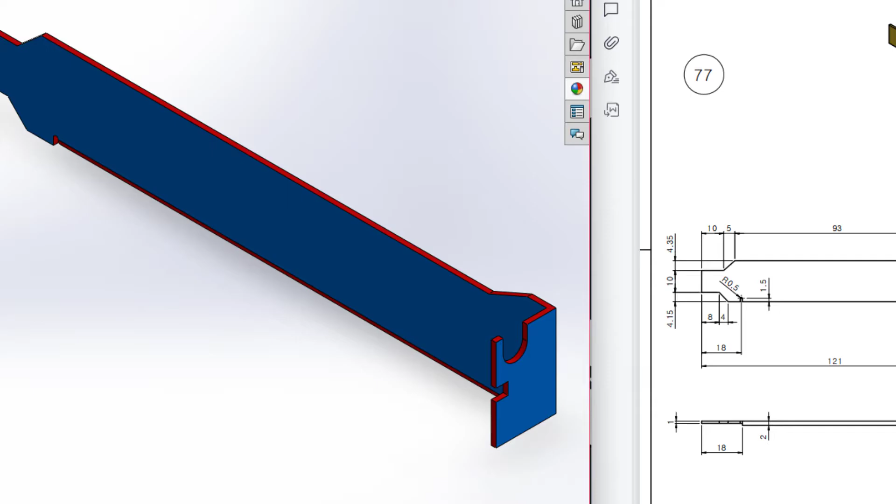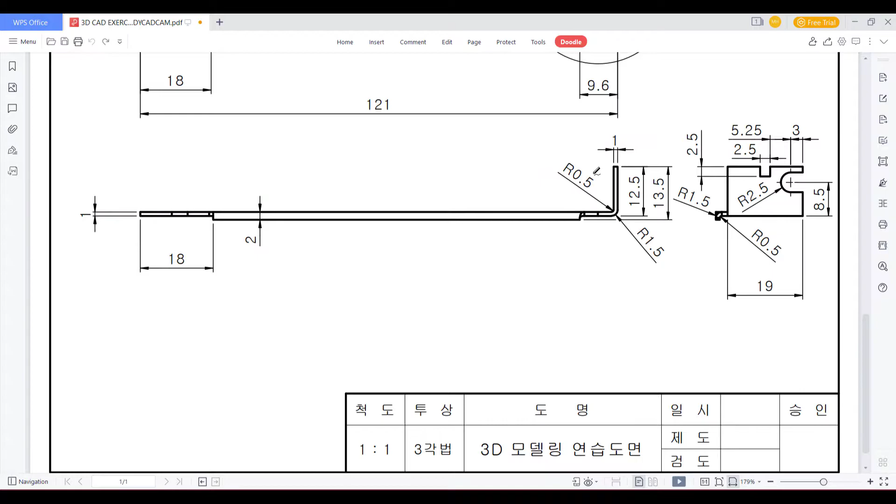Today we're going to solve this problem. In this problem, we can see the front view, the bottom view, and the right side view, which is cut here, but cut in here, so it is a 90-degree angle. Don't get confused. Here we can see it has an extrude boss of 1, and here it has 2, meaning the 2 extrude boss is this part.

So we first begin drawing with the bottom view. In the bottom view, first we will draw a line which is 121 minus 1, because 1 is the extrude boss. Then we will draw a length which is 12.5 minus 1, because 1 is the extrude boss length. So let's get started.

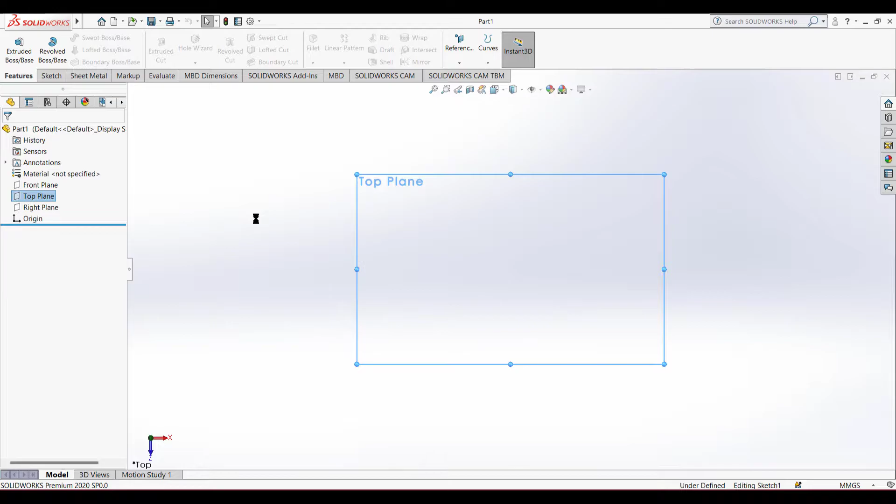First select the top plane and normal to it. As it is a bottom view, again normal this. Now we have got the plane. Now take the line and draw a straight line which is 121 minus 1.

Now draw another vertical line which is 12.5 minus 1. As you can see, we have drawn this line. Now it has 1 unit extrude, so we can offset this with this line.

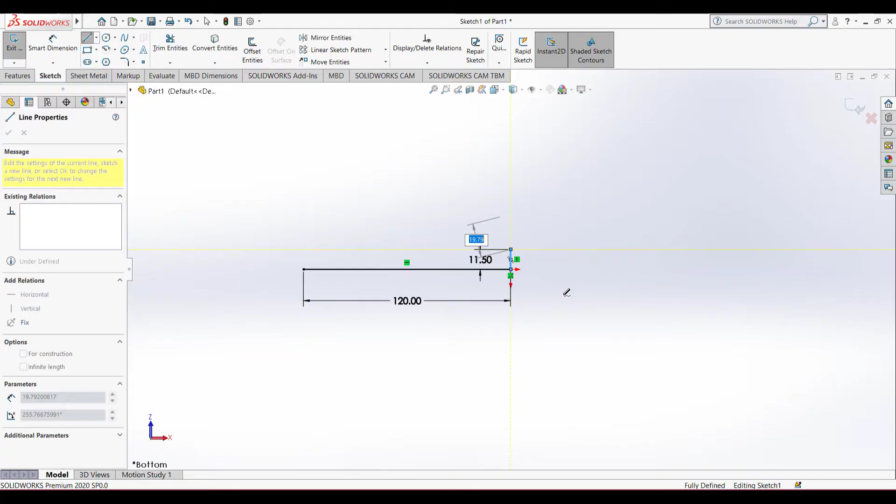Now go to offset entities, select this, and give the offset parameter 1. Now cap ends, lines, give OK.

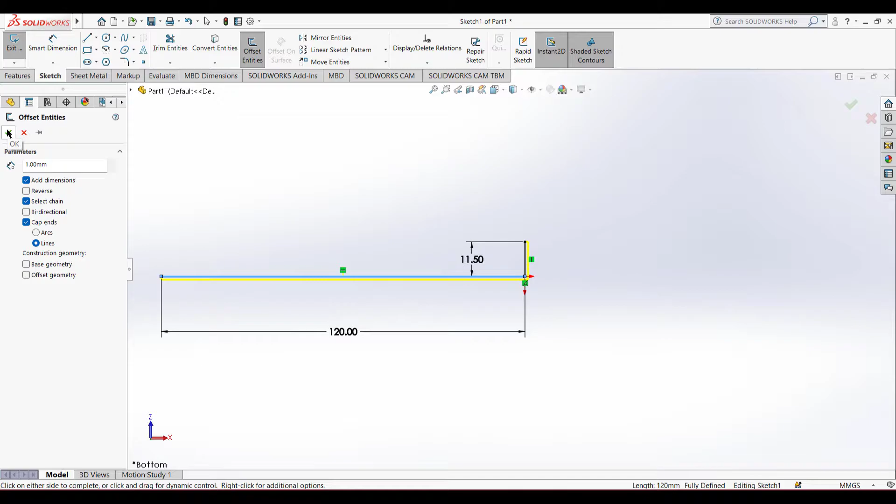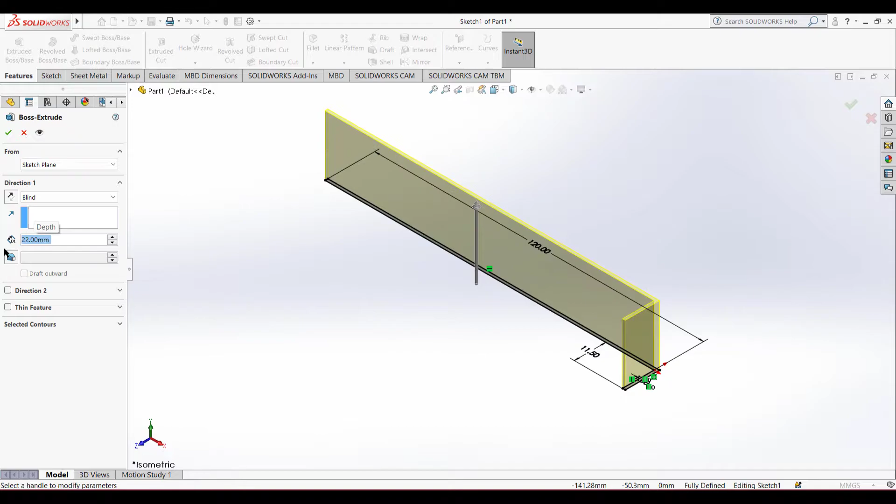Now extrude boss, go to features and select extrude boss. Here we can say it is 22 unit height, so give extrude boss of 22, enter. Now we have got the L-shaped shape.

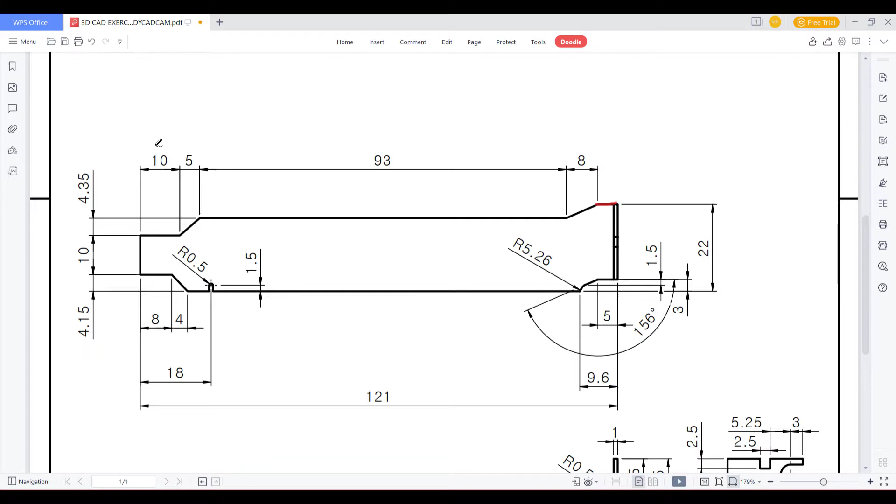Now we will draw this extra part and then extrude cut this. First we can see that this line is 121 minus 10, 5, 93 and 8. So first draw this line.

We'll draw this at the front plane. Go to front plane and normal to it. Now take a point, and now dimension it.

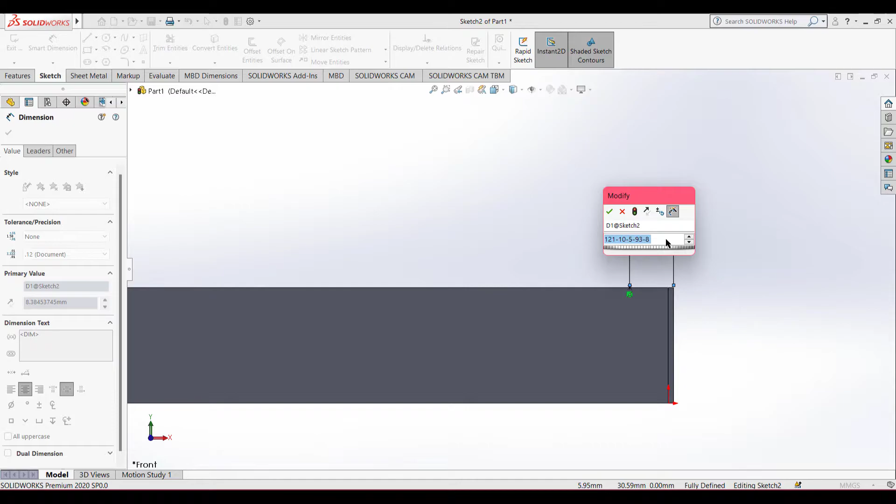As we know, the total length is 121. Now we'll subtract the length 10, 5, 93 and 8. Now give minus 10, minus 5, minus 93, minus 8. Give OK. You can see it has the 5 unit.

Now again go to line. Now we'll draw this line which is 8 unit in horizontal, and the vertical line will draw from 22 minus and all this length. Let's go for it.

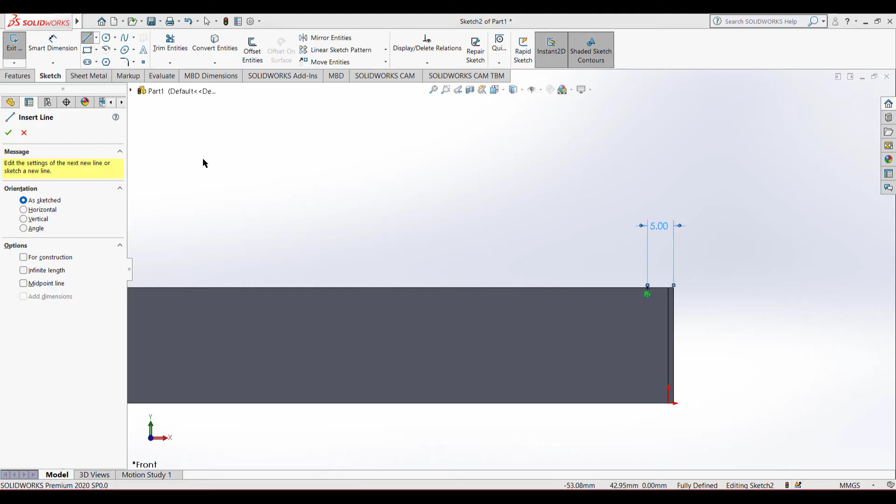Now select the line, select the point and draw a line. Now dimension it 8 from horizontal. From vertical, we will give 22 minus 4.35 minus 10 minus 4.15, which will lead to 3.5. Now we'll draw the 93 horizontal line.

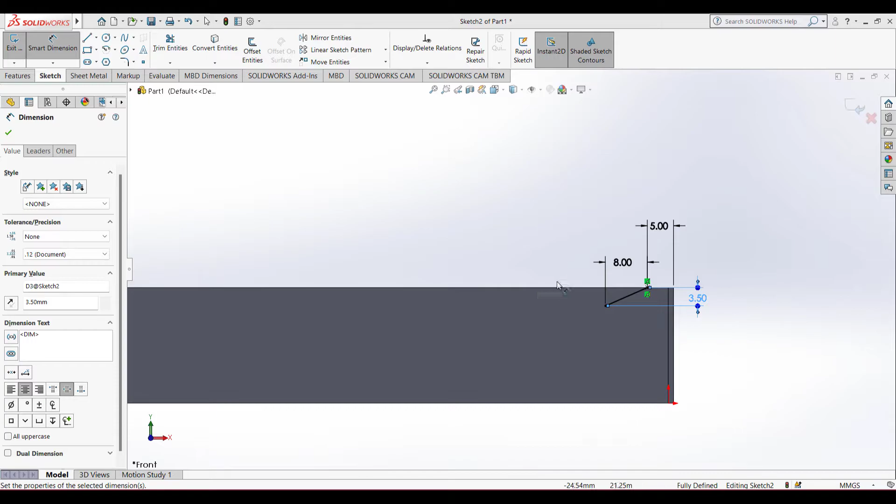Now again select the line and select the point and take a 93 unit line. Now again we have to draw another inclined line, which is 5 unit in horizontal and 4.35 in vertical. Now dimension it 5 unit in horizontal and 4.35 into vertical.

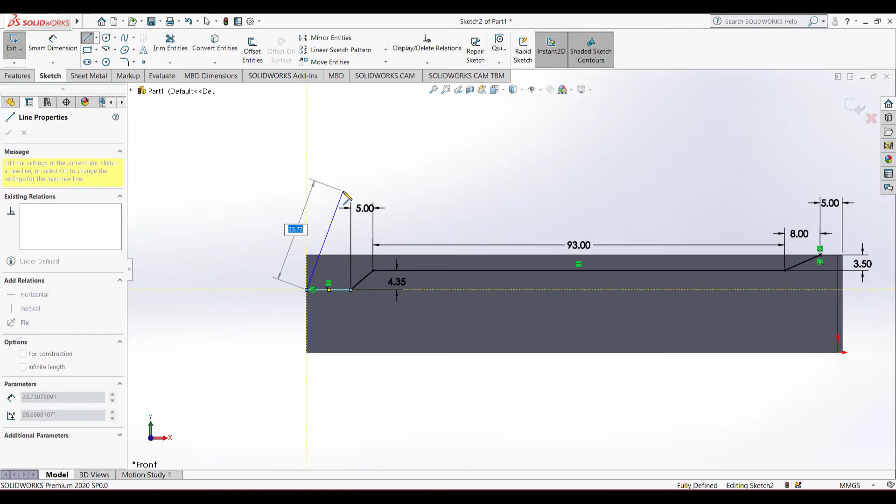Now we have drawn the upper shape. Now we will draw the lower shape. In the lower shape, we can see it has 4.15 unit from the height. Now take a point and dimension it 4.15.

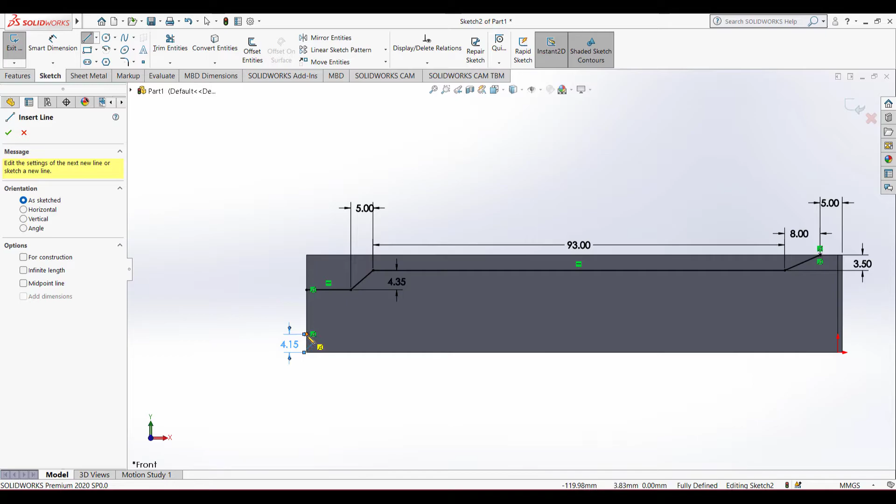As we have drawn it 4.15, now we will draw a horizontal line of 8 and an inclined line which has horizontal parameter 4 and vertical parameter 4.15. Now you can select the line. Select line, then dimension it 8.

Now draw an inclined line which is 4. We have drawn this line.

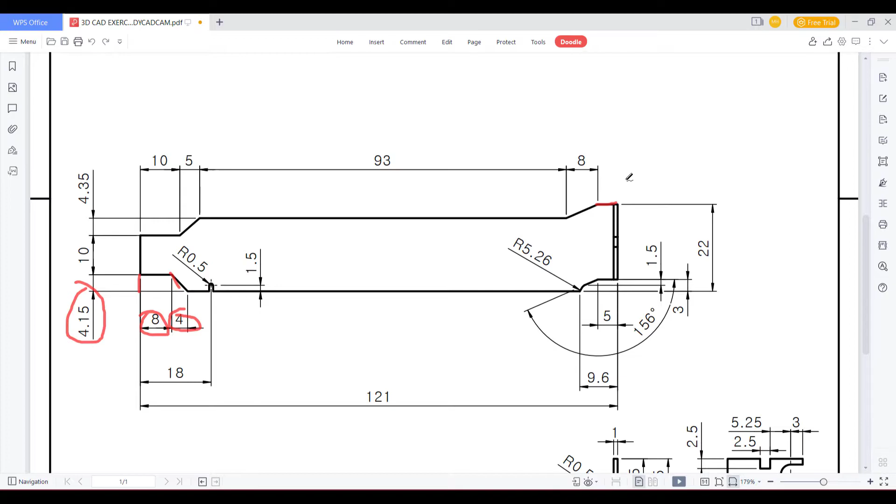Now we will draw this line. Before doing this line, first close this and these parameters. As we can see, these are open. Now make them close. To make this close, we will surround this line with another line, so we can get a close boundary in our shape. So to get the close boundary, we will do this.

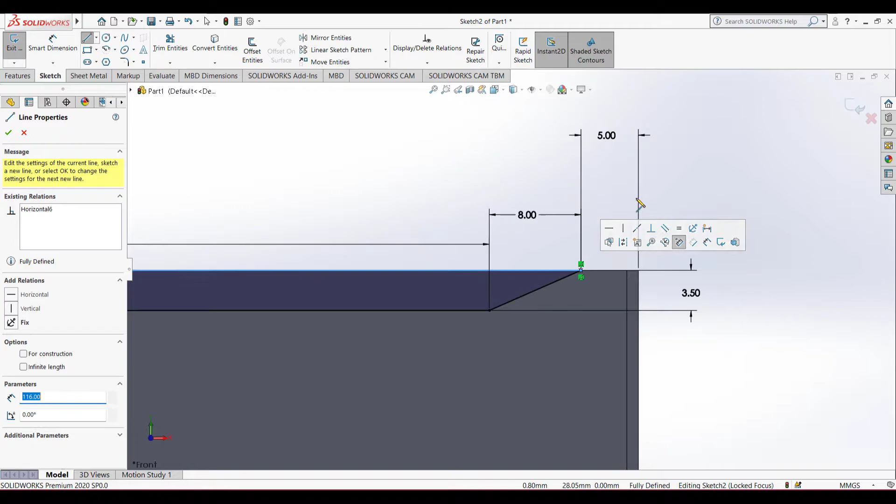After the closed boundary, we will now try to draw this shape. To draw this shape, we will first draw a horizontal line of 5, then an inclined line which is 1.5 and 1.5 from here to 1.5 and 156 degree. Now take a point which is 3 unit height.

Take the point and give it a 3 unit height. After giving the 3 unit height, now draw the 5 unit horizontal line. Now we have drawn the 5 unit horizontal line.

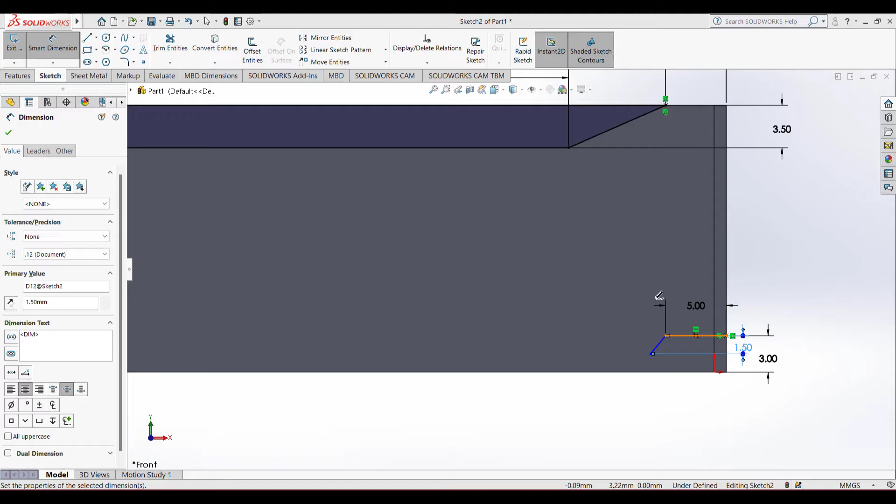Now draw an inclined line. In this inclined line, this is 1.5 unit of vertical and 156 degree. Now dimension it 156 degree.

Now we can see this point. This particular point is 9.6 units apart from this line. Now take a point, place the point and dimension it 9.6 from the end point.

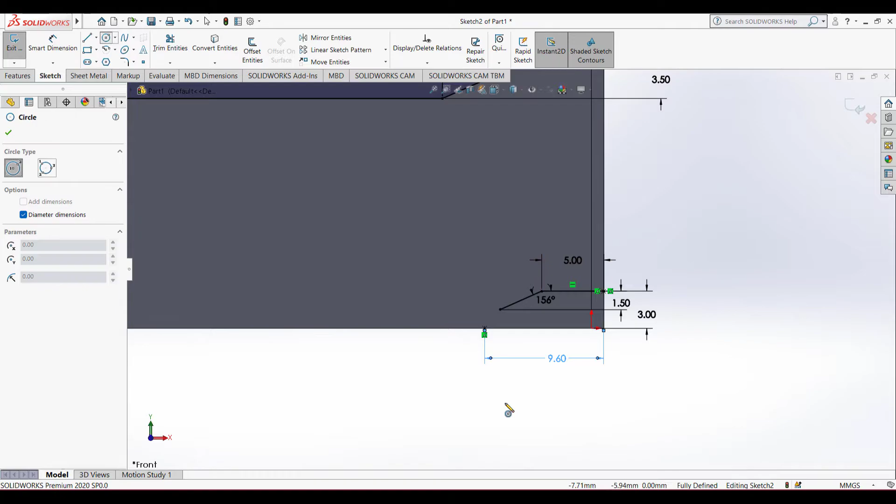We can see there is an arc which is 5.26. We will now draw it. First take 5.26 into 2 as a circle. Now coincide the circle with this point. Select the circle and select one of this point, then coincident. Now do this for the other point. Select the point and select the circle and coincident again.

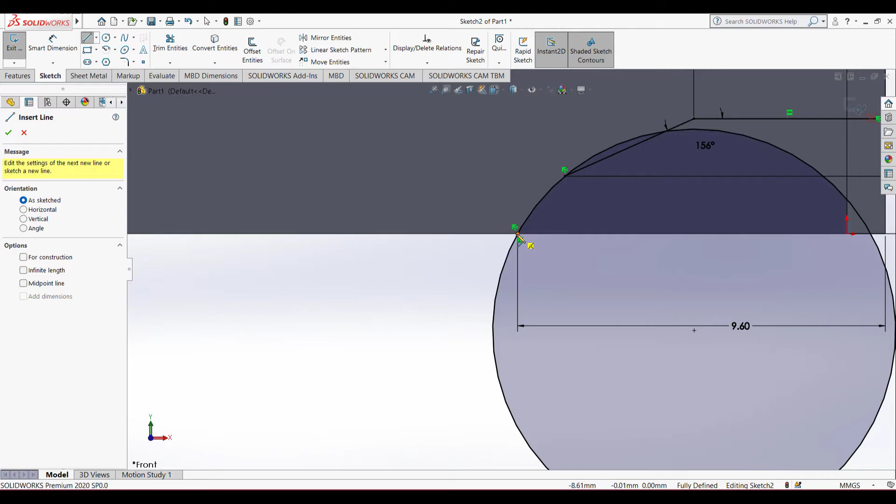We are getting our shape. Now close the boundaries. We are closing the boundaries, and trim all the unnecessary part.

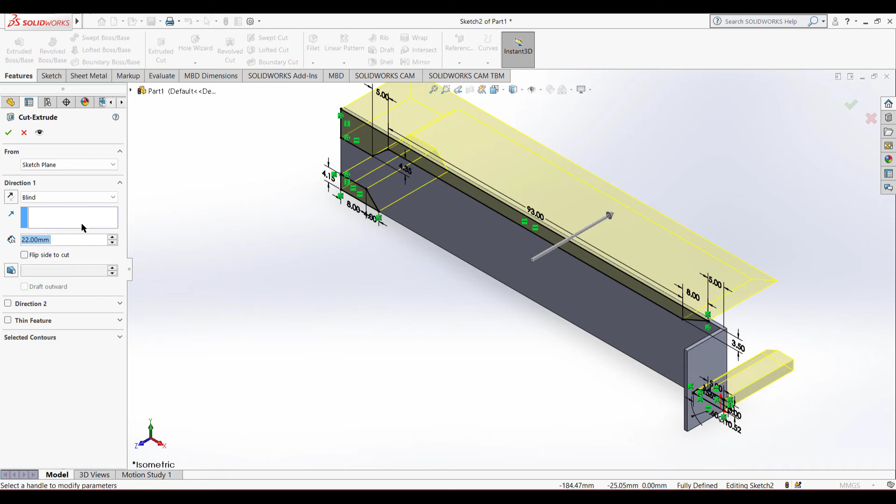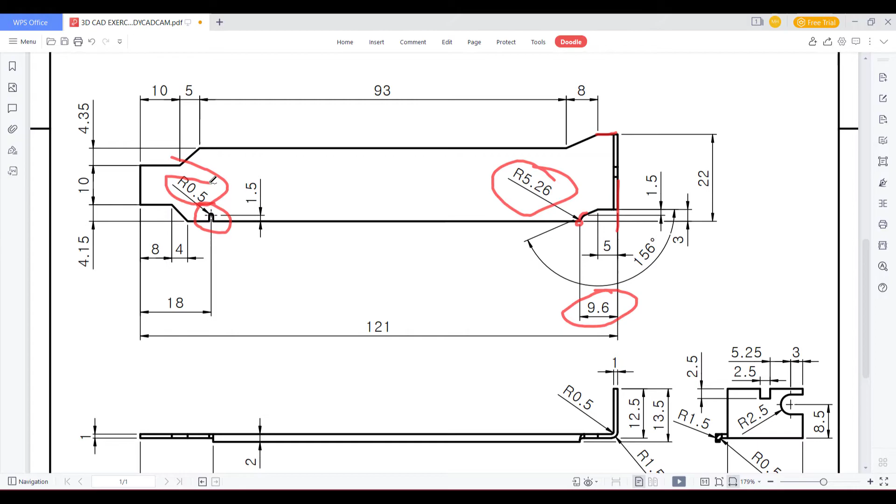Now you can see we are quite close to this, but we can see that we have another part here, which is 0.5 in radius and which is 1.5.

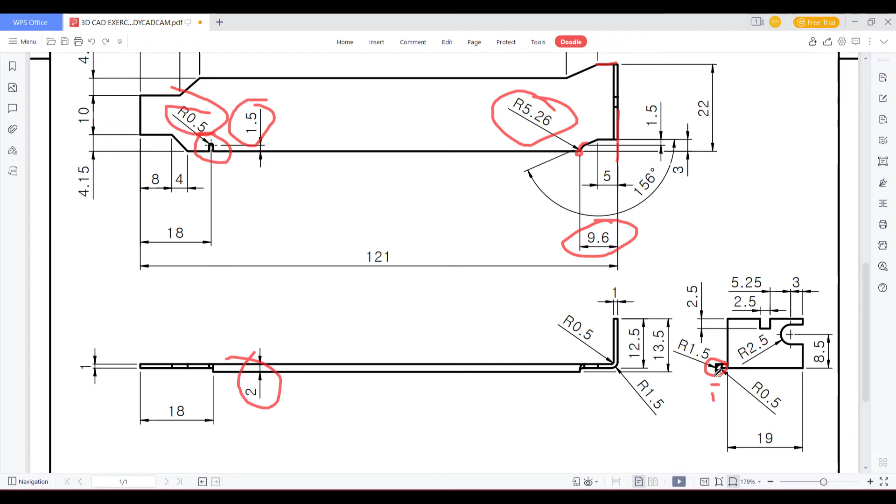Before doing this, we will draw these two unit lines. We can see this shape has a little dimension, which is here 1, and the shape here is 2 units. First let's take the bottom plane and draw this shape, which is 121 minus 18 minus 9.6. Let's try to draw this.

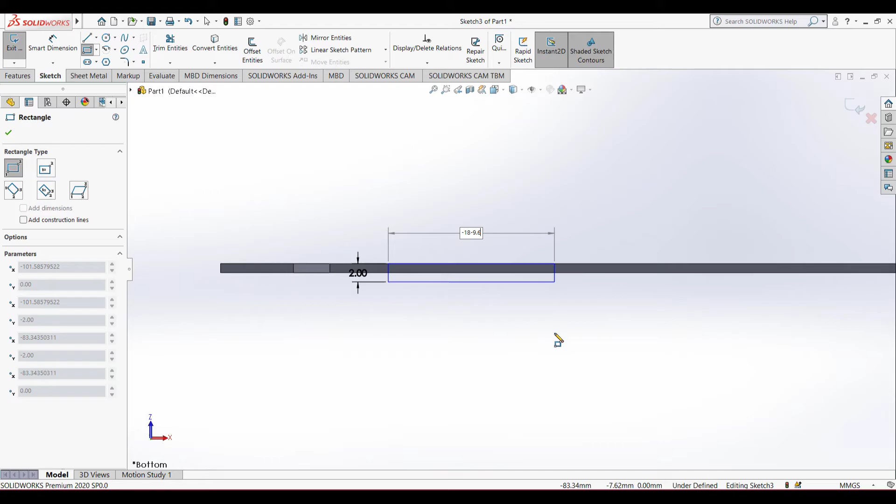Take this plane and sketch normal to it. Now select the corner rectangle, and as you can see it has 2 units of width and a length of 121 minus 18 minus 9.6.

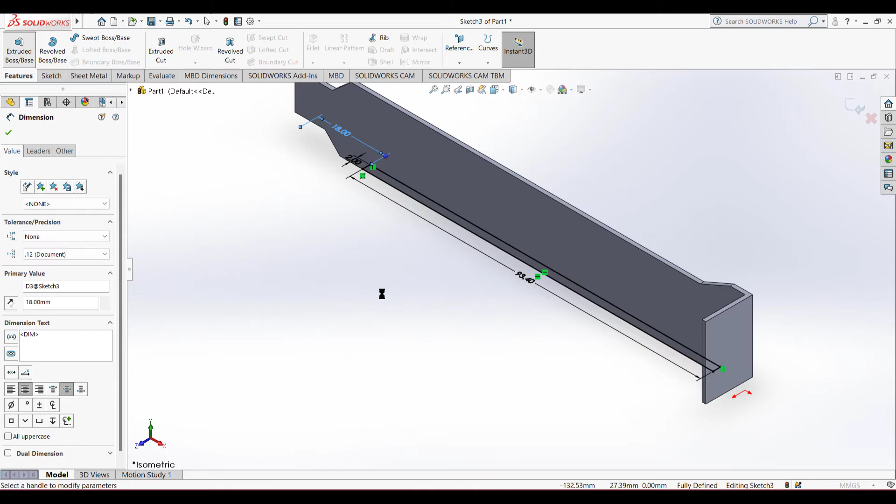You can see it led to 93.4 units, and dimension it from the corner. From the corner we can see it has a distance of 18 units, so we have given the distance of 18 units. Then go to features and extrude boss, and extrude boss it to 1 unit. We will extrude it to another side, so change the direction and give OK.

After that we have found this shape. Now we'll draw this extrude cut part. You can see it has a radius of 0.5, and 1.5 apart from here, and 18 from here.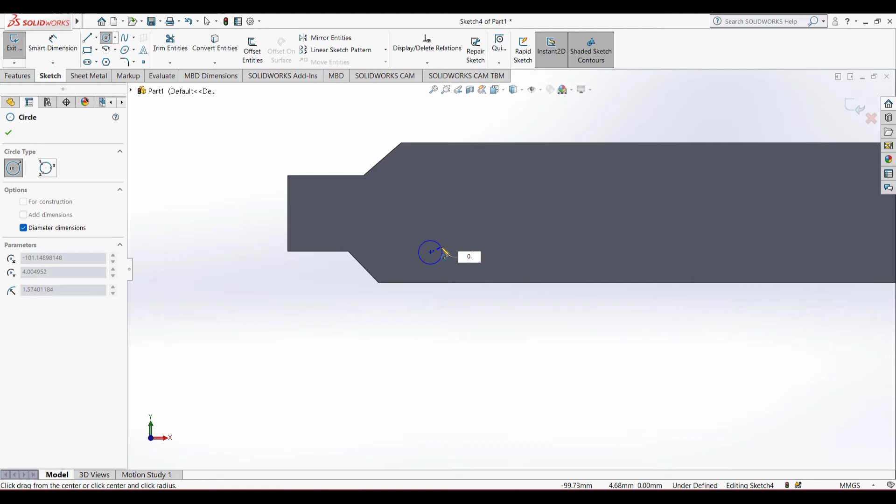Now select this plane, sketch, and select the circle, which is 0.5 into 2, giving 1 radius. Now dimension it from bottom, which is 1.5, and from the side it is a distance of 18 units.

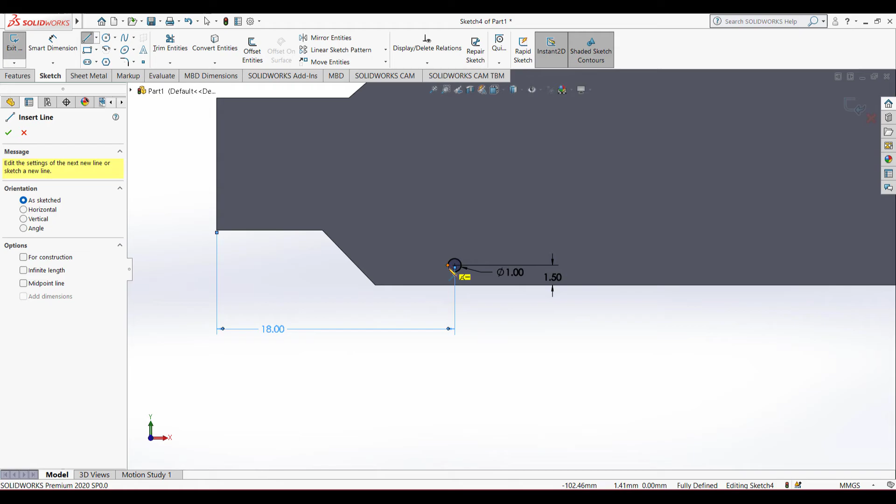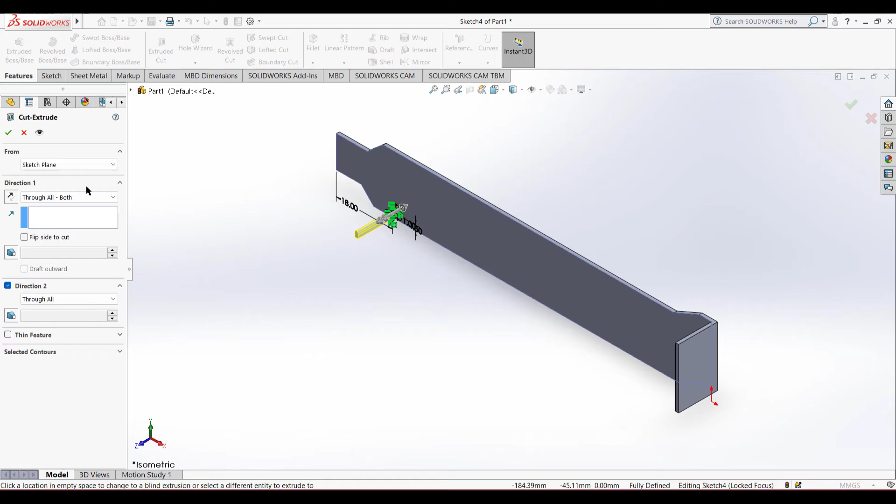Now we'll draw the shapes which are necessary, then extrude cut the unnecessary part. Now go to features, extrude cut. We have extruded cut this part.

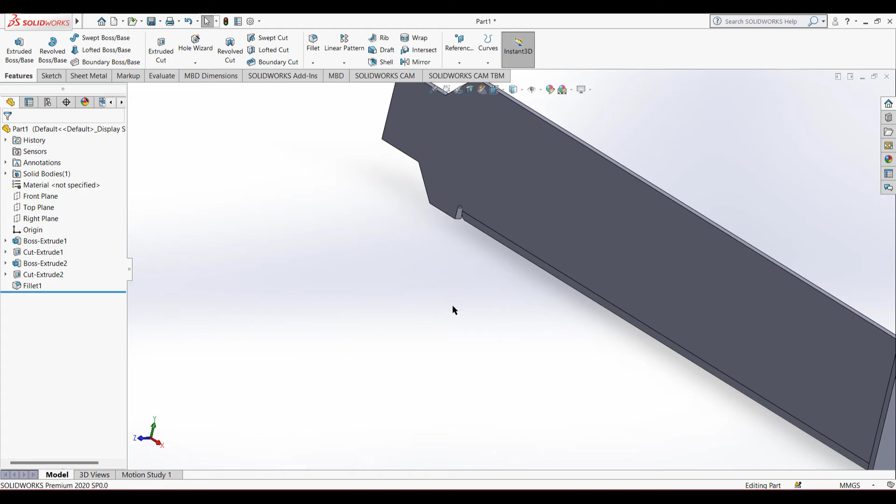Now we can see we have a fillet of 1.5 and a fillet of 0.5. Now give this fillet. Go to fillet and select 1.5 and select this corner. You can see there is a fillet here, and the other part has a fillet of 0.5. Select 0.5 and select the other corner, which is this line, and select OK.

Now we have done almost here, but we have the right side. Now we'll draw the right side, which is a circle of 2.5 radius, apart from 8.5 and 3. Let's do it. Select any sketch.

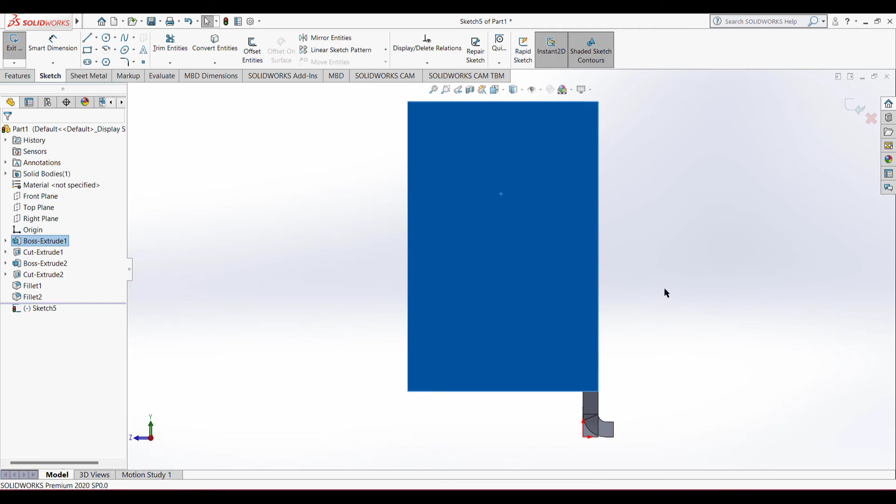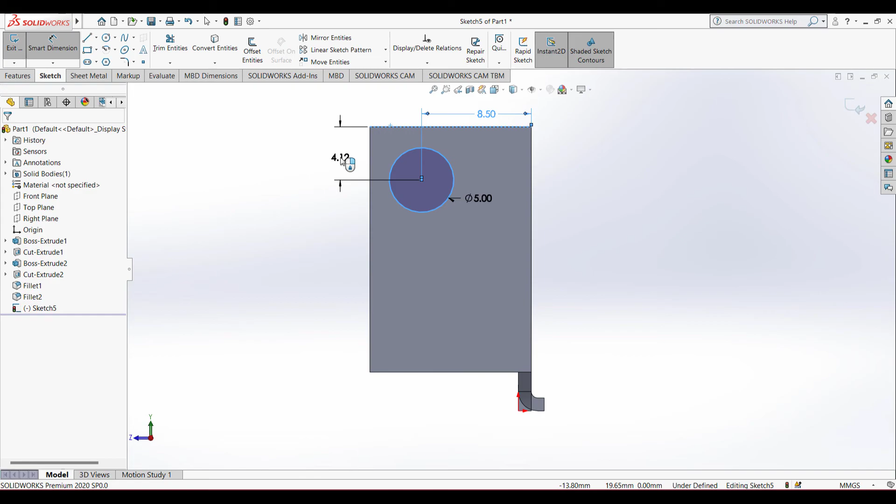Select circle, which is 2.5 into 2, which is 8.5 apart from here, and 3. Give 8.5, and which is the height of 3. Give 3, and now give it proper shape.

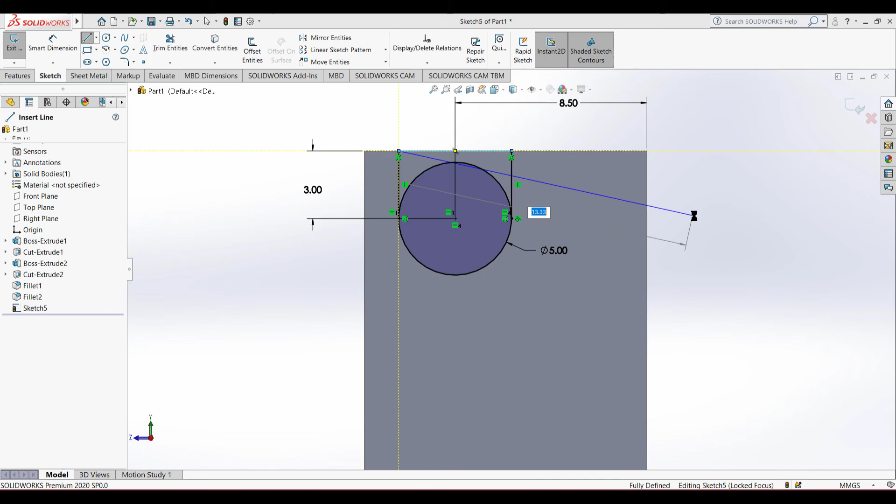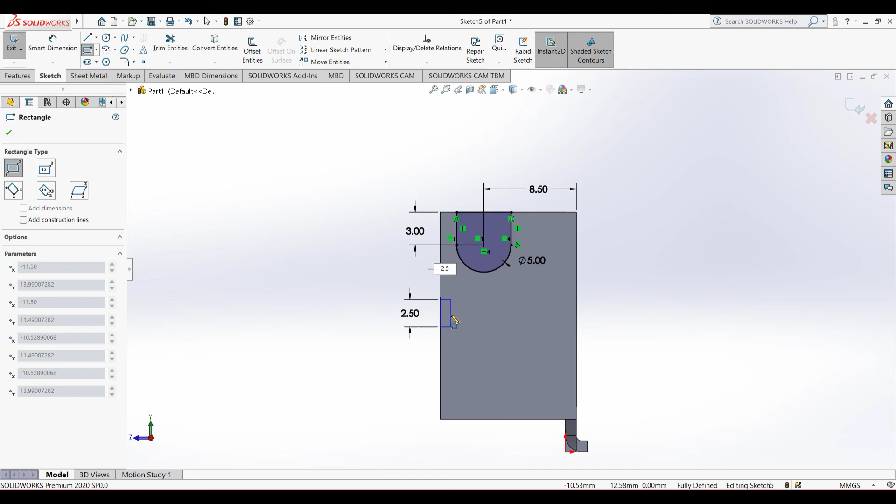Now cut the unnecessary part. We have another shape here, you can see, which is 2.5 square, apart from 3 plus 5.25. Now draw this. Select corner and draw 2.5, then 2.5, which is 3 plus 5.25 apart.

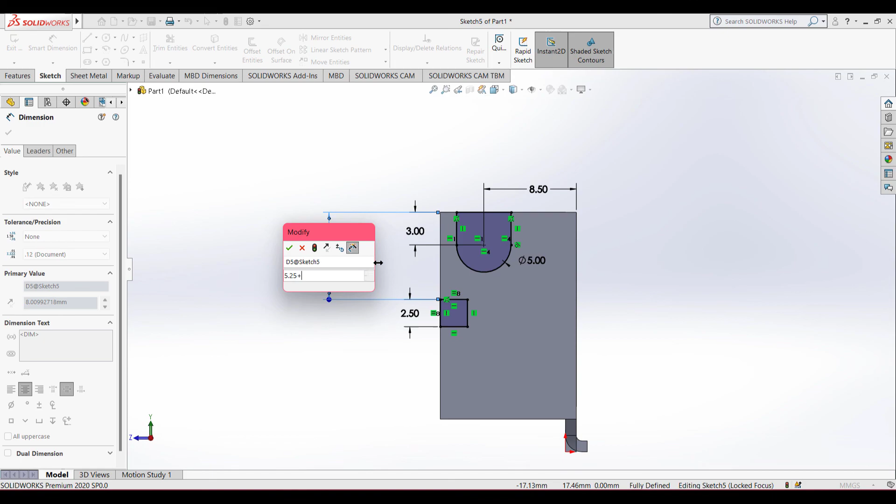Now go to smart dimension and select this corner and this side, which is 5.25 plus 3, which is 8.25. Now go to extrude cut. Go to features and extrude cut it, and we will give the through-all option.

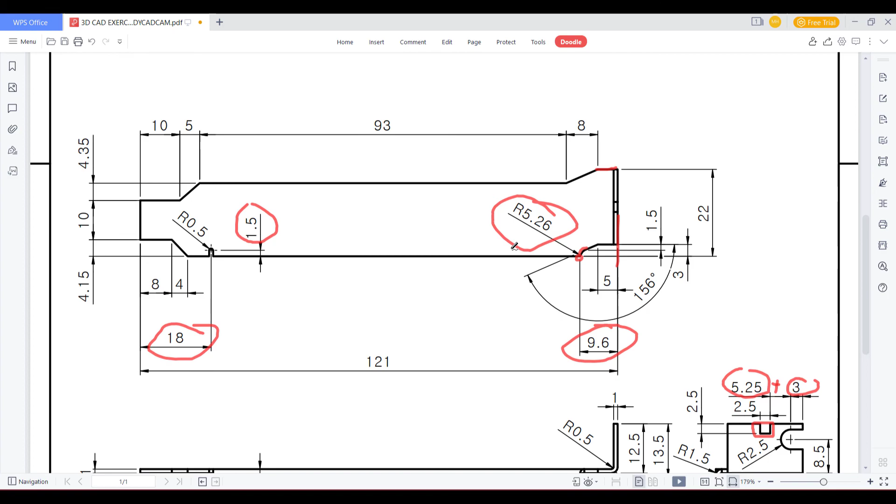Now we can see that our sketch is quite similar to this. This means we have finished the work, and thank you for watching till the end.